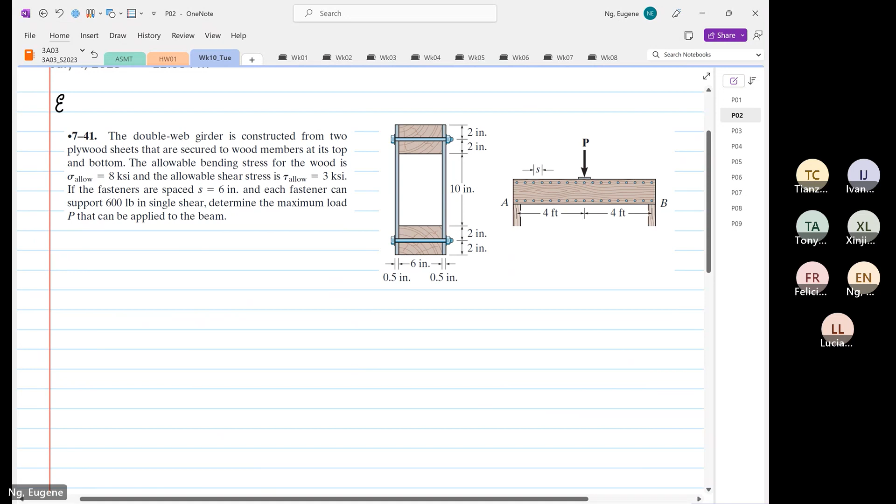The double web girder is constructed from two plywood sheets that are secured to wood members at the top and the bottom. So we know that these are known as your plywood sheets. And over here, you have top and bottom members, and they are made of wood. Okay, these are all your plywood sheets.

Now, interesting, what information are they giving us. The allowable bending stress for the wood, so stress allowable, is equal to 8,000 psi. And the shear stress allowable is equal to 3,000 psi.

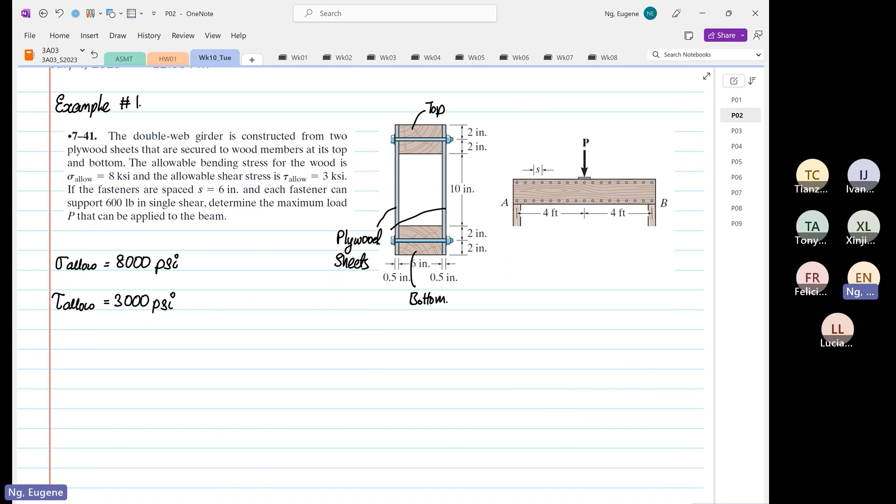They give us both the normal stress and the shearing stress. And they told us that the spacing of the fastener, which is S, is equal to 6 inches, and each fastener resistance force, or what do I call it? I call it earlier fastener resistance force. Fastener resistance force is equal to 600 pounds for single shear configuration.

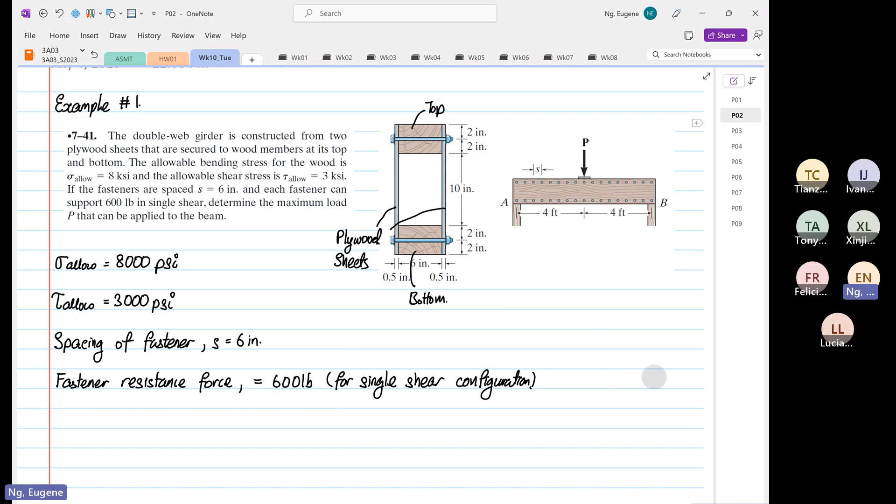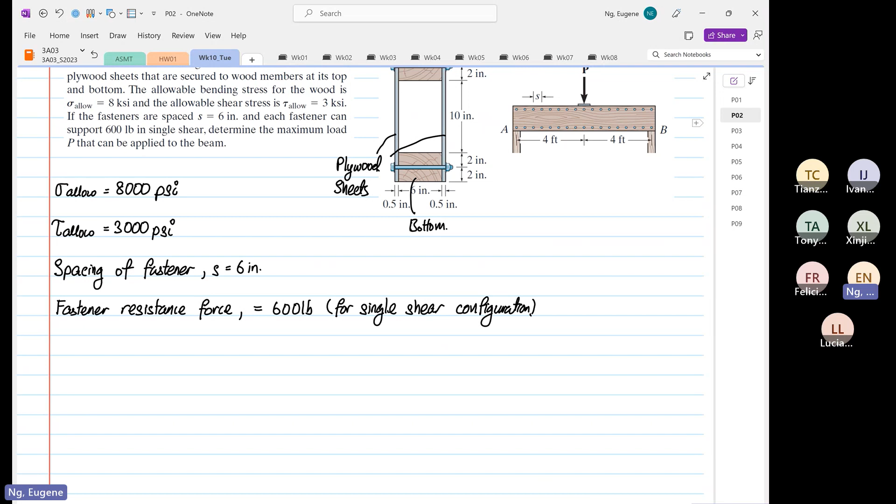So there are a lot of things that we have to recap over here. We are given quite a bit of information. So there are a few modes of failure. So what are the possible ones? Let's look at different failure modes. The thing about this analysis is you have to view different modes of failure. So what do I mean by that? They give us 3 different values.

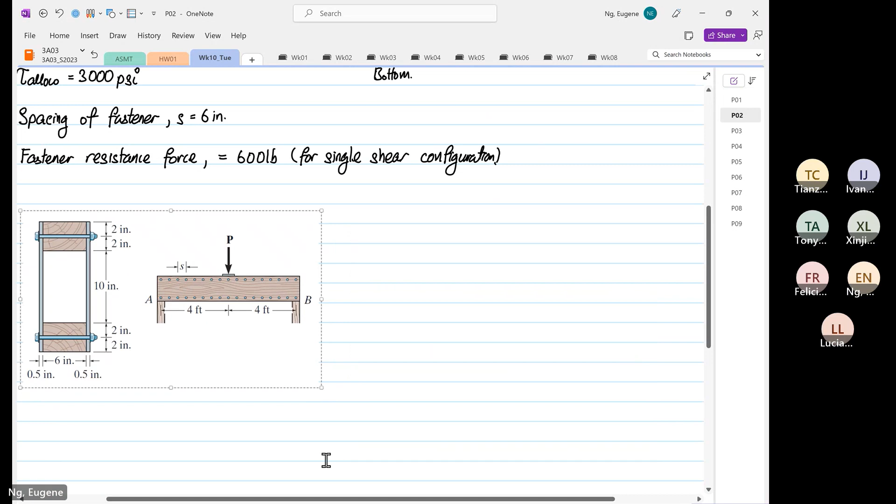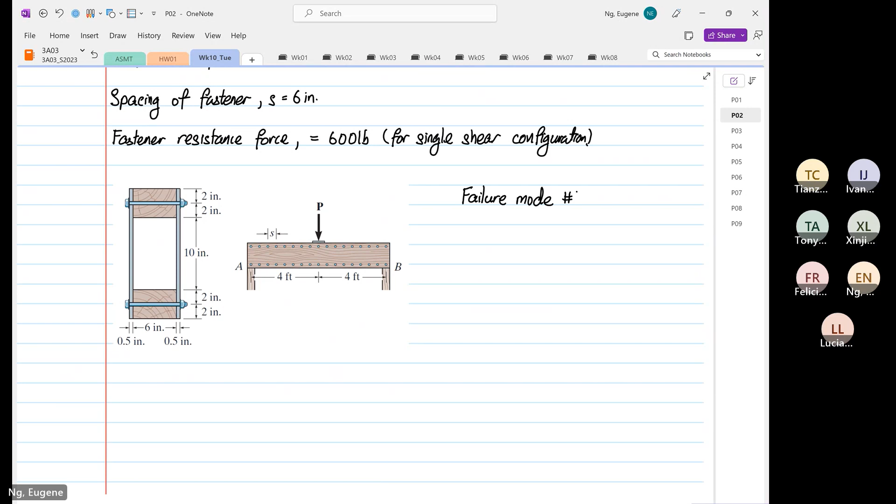So we are going to determine failure mode number 1, which is failure at the joints. So failure at the joints, okay, which is failure over here. This is failure at joints. Now the failure at the joints is a very interesting term over here. So what do I mean by that?

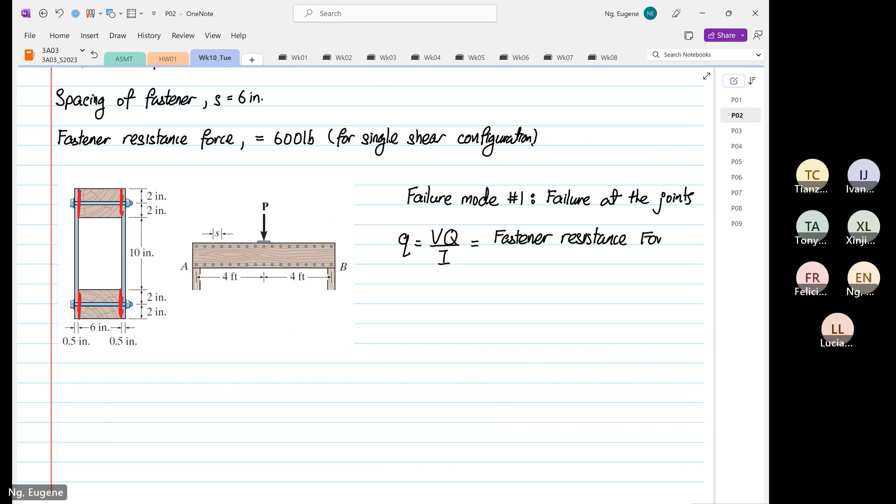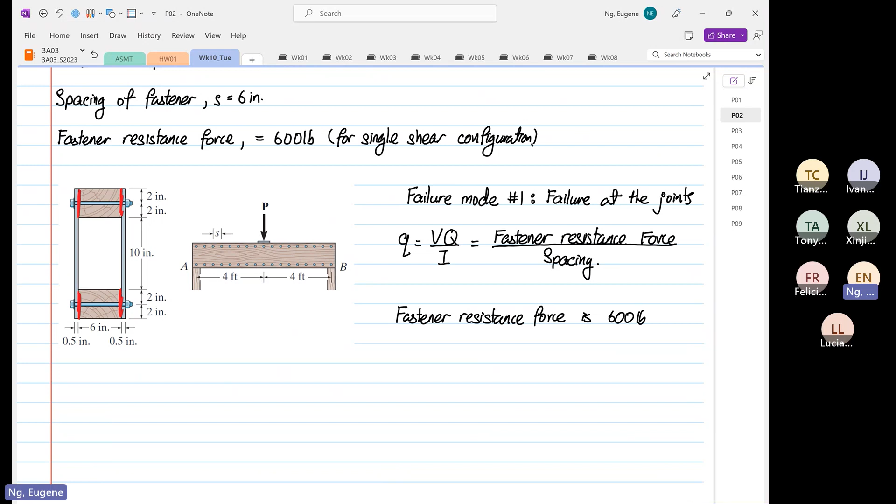The formula that we can relate is q equal to VQ over I, and this is equal to fastener resistance force divided by spacing. So we were given that the fastener resistance force is 600 pounds. I'm going to talk about this. And they did highlight to us a single shear, as you see earlier. And we know that the spacing is what? 6 inches.

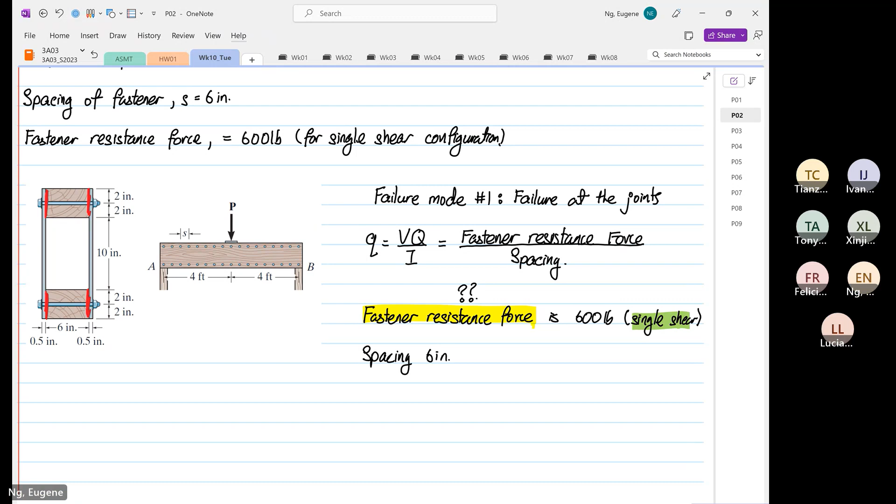Now, what I want to highlight is how do they get this value? Because only if you understand how they get this value, then you know what it means. So first we want to see how they get this value, and the next thing that I want to revise with all of you is what do we mean by single shear. You can see down here, hey, why does this term single shear appear. What does it actually mean? So let me talk about fastener resistance force first. Let's look at fastener resistance force.

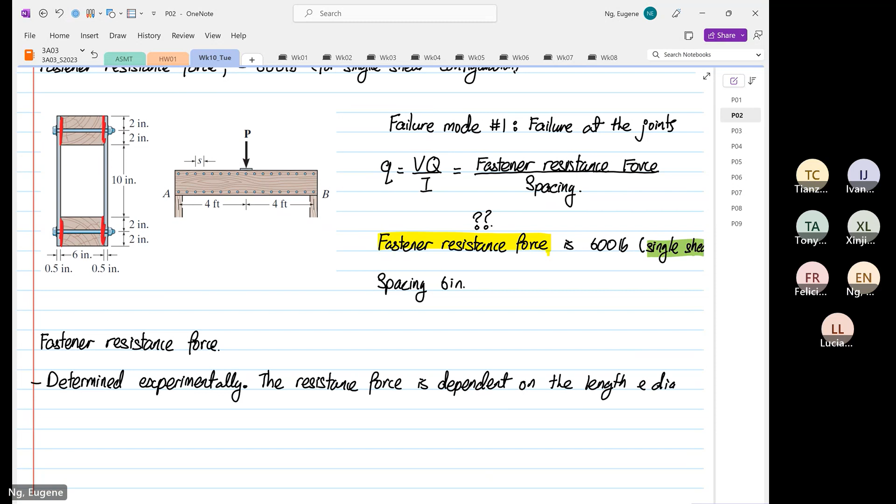So this is determined experimentally. And we know the resistance force is dependent on the length of the screw, length and diameter. Length and diameter of the fastener.

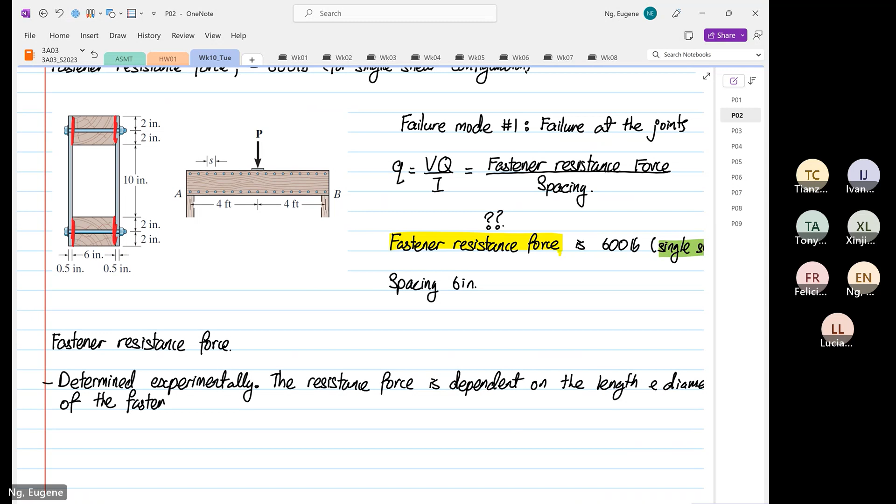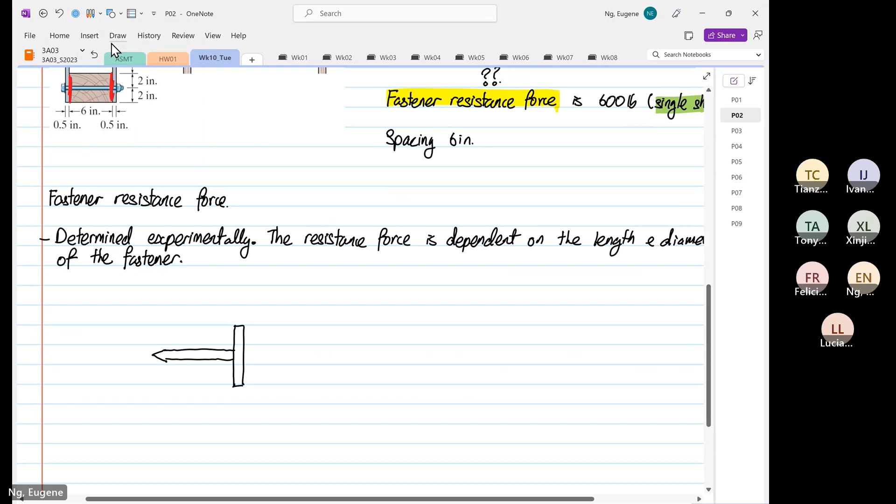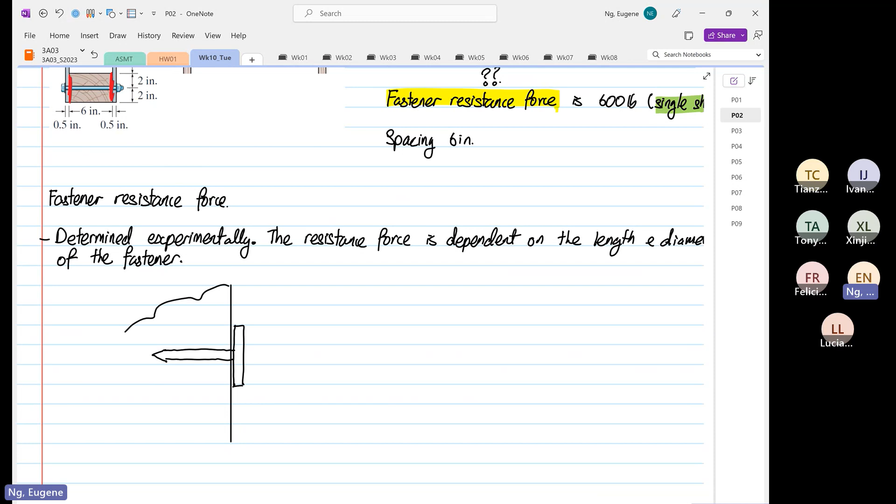So what happens is, for this case, the fastener is a nail. For example, I'm going to draw the nail. So we have a nail, and this nail has been hammered into a member. So this nail goes into a member. It's nailed into a member. And this is the cross section.

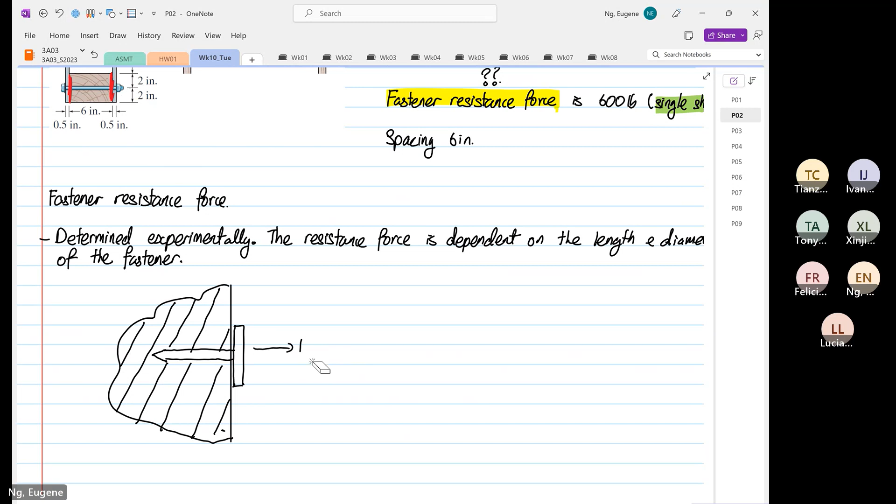So what they do is they will apply a force, or an increasing force is applied, till or until the nail starts to move.

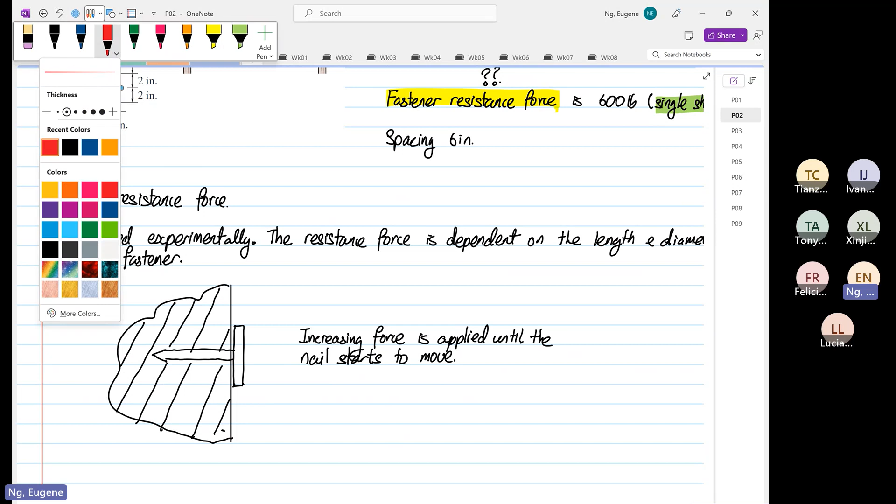And some of you might say, Eugene, the force you're applying, the force that I'm drawing in red now, is normal to the surface of the head of the nail. So why is this the shearing force, or why is this the resistance force?

Or sorry, wrong question. Why do we analyze shear when the increasing force is perpendicular to the surface? Okay, we ask ourselves this.

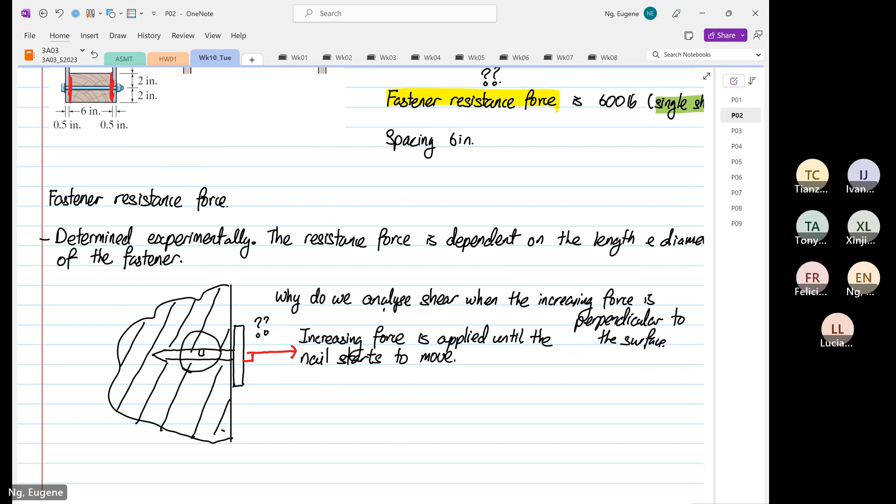So if we look into this part of the nail, and if I were to put an element down here, and increase the size of the element, this is the size of the element. Because the nail will want to move, this is the direction of the motion, since we are pulling from left to right. We know that we are going to have a resistance. So if I draw my configuration, this is my Y, this is my Z, this is our rotation of X.

So we know that we have a resistance. We know that we have a shearing stress acting in this way, and it will resist the motion. So this is shear, and this intersecting plane is Y, and this is Z. So this is shear Z, Y. Because of this shear stress, it is resisting the increasing force and making the nail stay. So that is why we look at the shearing configuration. That's why when pulling our nails out this way, the force actually applied causes a resistance that is parallel to the surface, which is known as shearing stress.

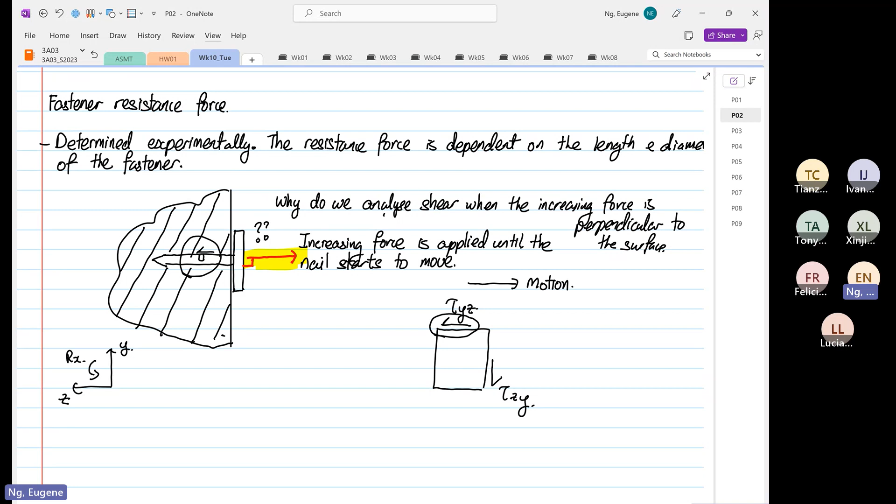Okay, so that's the first thing. That's why for fasteners, we look at shearing stress and not normal stress. No doubt the force that is applied, that I drew in red, is normal to the surface of the head of the screw, yes. But the resistance force, or the resistance stress, is parallel to the surface on the nail over here.

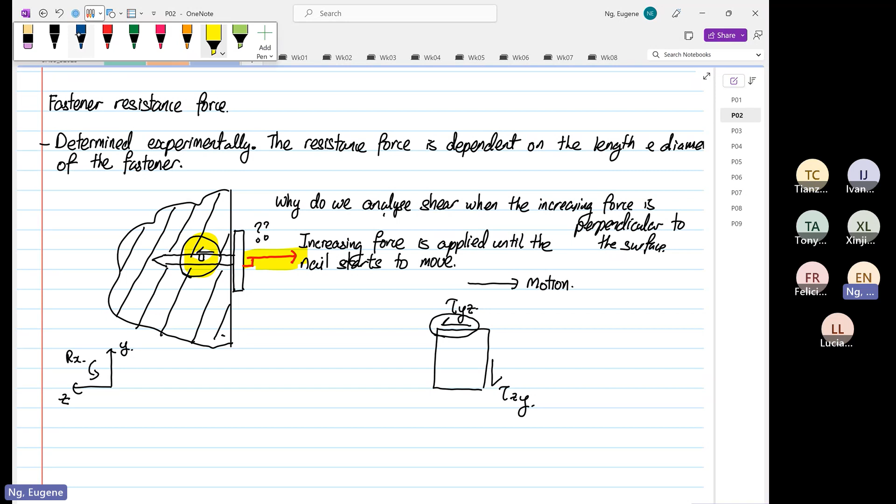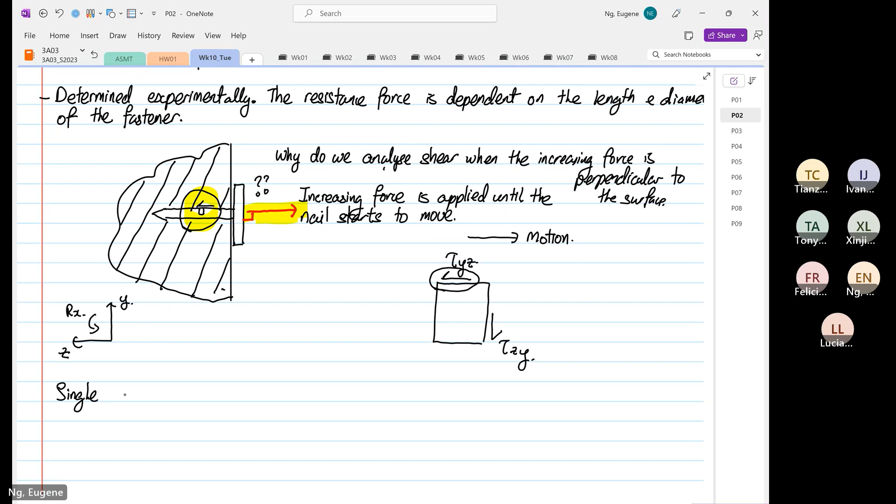Number one, second thing is, what do we mean by single shear and double shear? Let's look at what is single shear. This is just a revision for you. So what is the difference? Single shear, yeah, I'm going to draw single shear.

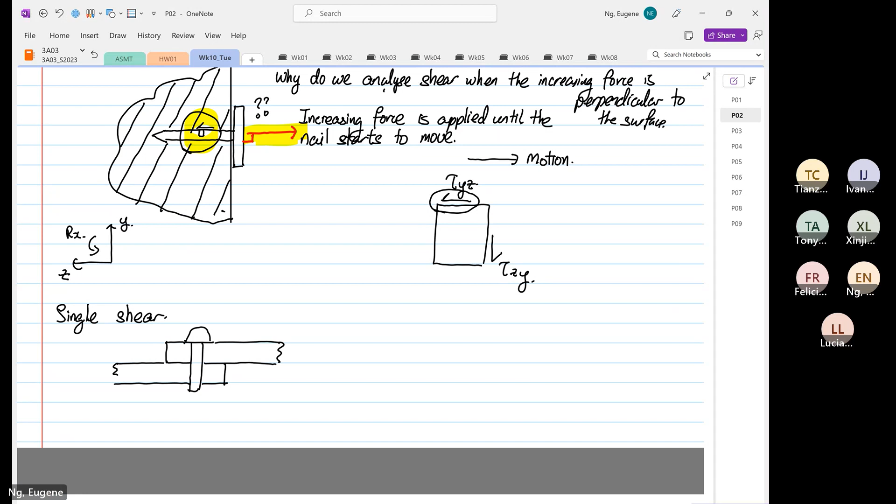So if we have plates, if we have two plates, I'm going to draw the fastener. So this is our fastener, and then we have one plate over here, and then we have the other plate over here. This is member number one, this is member number two.

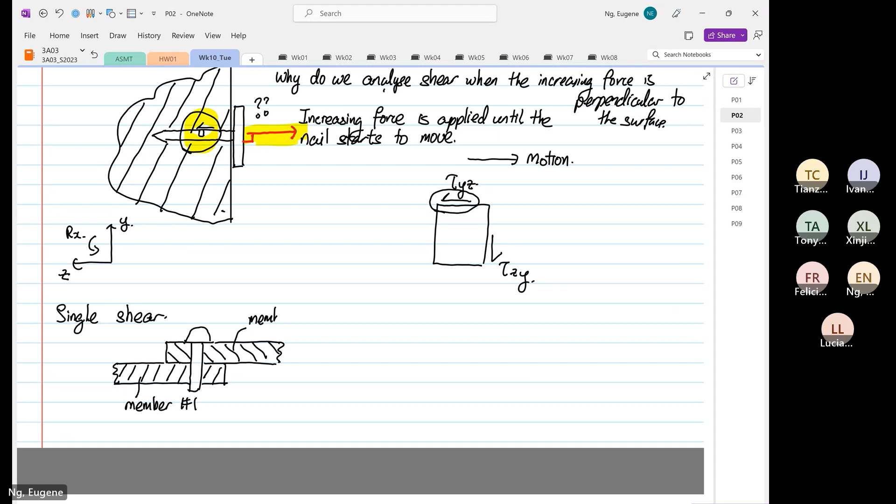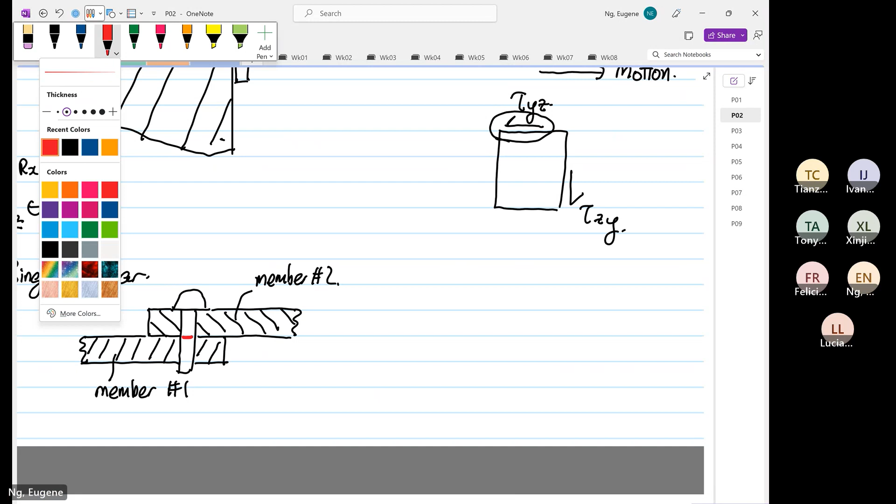We know that if this thing were to fail, failure will shear the bolt, or the fastener, exactly where I put my red line. So that is where the failure region is. So this is our failure region.

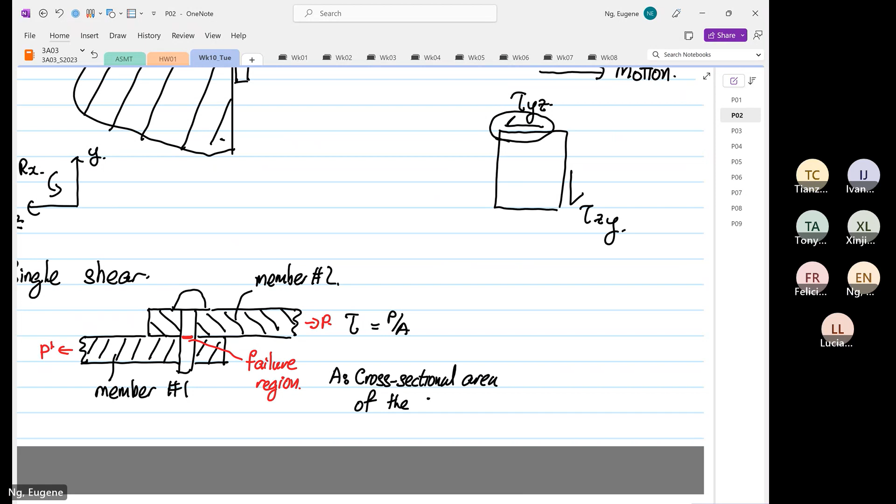So when that's the case, the shear stress is equal to, so if we have loads, this is our P, and over here this is P prime. So we know the shear stress is equal to P over A, where area is the cross-sectional area of the fastener. We know that. So this is what we call single shear configuration.

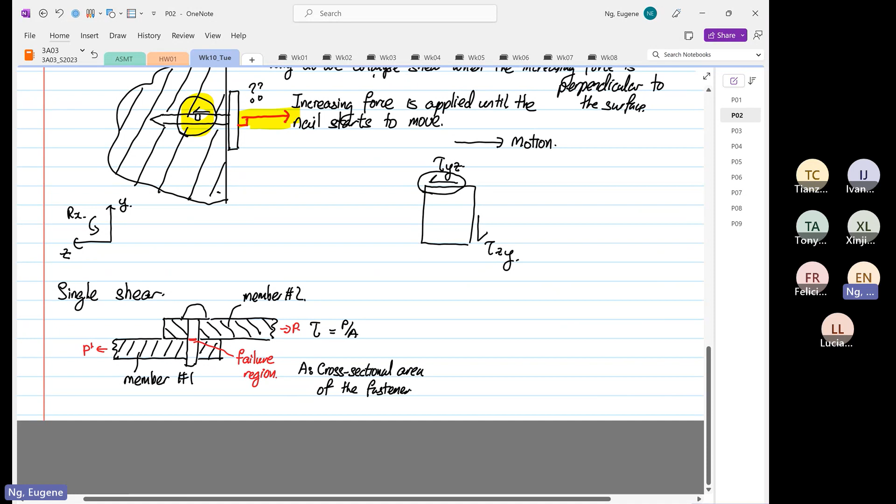If it's a double shear, okay, again, I'm going to draw our bolt or our fastener.